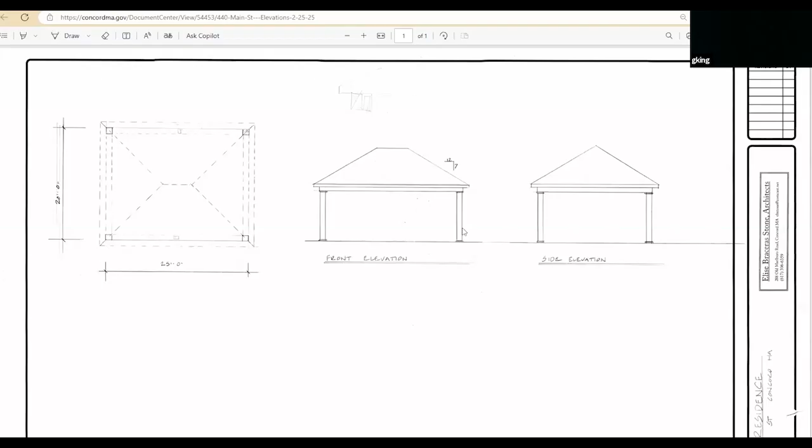I'm happy to pause at any time if anyone's got comments. I want to give a little context. The long dimension called front is from Main Street - that's right, because when you look at the long side, the front, if you will, is along here, 20, 25 there, 20 feet this way. So the hip is visible from Main Street?

I don't think so. Like I say, it's 14 feet high, it's hard to even see, even this garage, which is much higher. No, I didn't mean that as criticism. I'm just factually, I think if you're standing on the corner of the lot there to the left of Main on the drawing, I don't think you'd see it. It's oriented such that you can see the hip. I don't think so, okay.

Part of the reason is there's a fence here, at the corner, sort of in the middle of the property. And because it slopes so far downward, I don't think even if you were to stop there on the sidewalk and look, you'd see it. Because even this garage, when I'm over on Main Street by my driveway, you only see the top of this garage over here. So, but anyway, thank you.

You may be able to see it. I have a question related. Have you put up a post or anything to see how high it actually reads from Main Street? No. Okay, so it's purely conjecture. Yes, okay, sure.

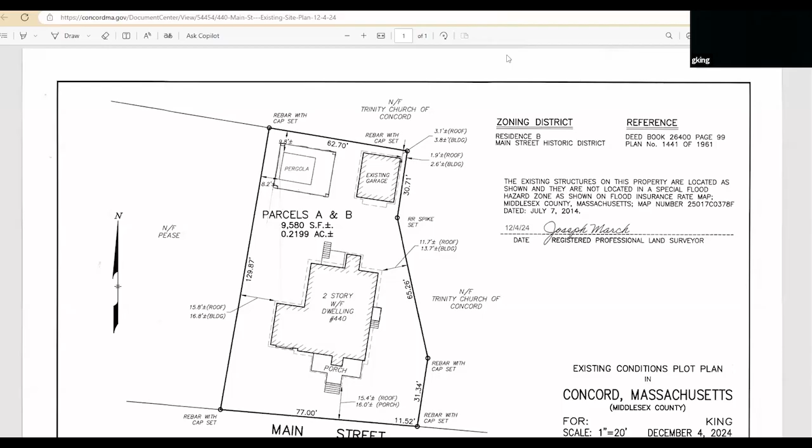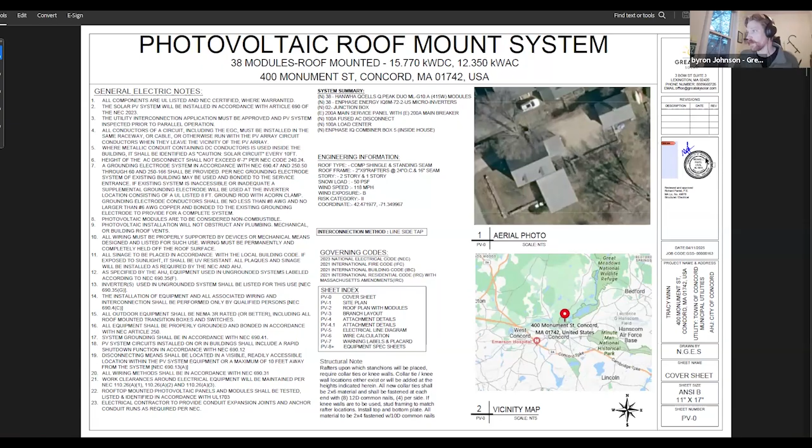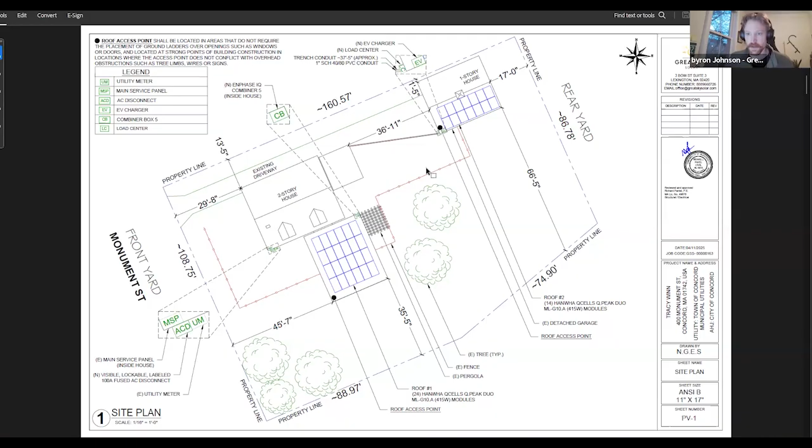So here's the site plan. As you can see, here's Monument Street right here. We have 24 panels all in one rectangle on this area of the roof, and then on the detached garage we're going to do another 14. Some things to keep in mind: right on this corner is where the utility meter is. We'll have to add, for the fire department and building department, an exterior disconnect, and I have a photo of that so you have an idea of what it looks like. We are also planning to trench from this corner here to the detached garage in order to get the electricity connected. I may be going fast or too slow, but feel free to go back to any of these at the end.

So here's just a visual of the panels. The fire department requires certain setbacks, so this is really just representing that. There needs to be a 36-inch pathway from gutter to ridge, as well as an 18-inch setback from the ridge.

This is just mounting equipment. I'll try to go through this quickly, but if you'd like to go back to it, that's fine.

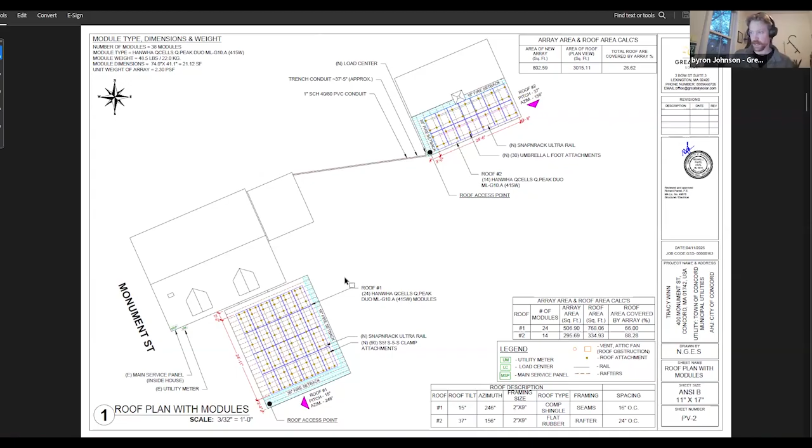Something to note: this roof has standing seam, and this one has asphalt shingles. So we'll be doing two types of mounting. This is for asphalt shingle, and right here, as you can see, this will be the standing seam.

The distance from the roof to the top of the panel is a maximum of 6 inches. It's most likely going to be around 5 inches.

Here is the panel we're proposing, all black. Just a little bit of specs here.

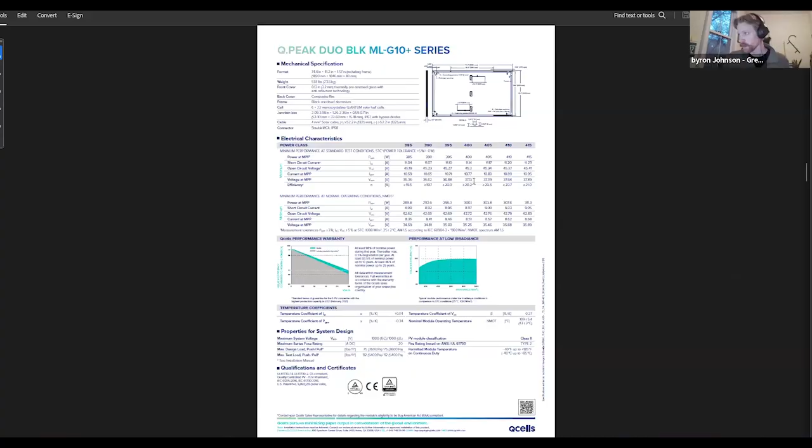These are the rails we'll be using. Upon installation, they'll be trimmed down to the edge of the array so you shouldn't be able to see any of them. And this is just a clamp for the standing seam roof as well.

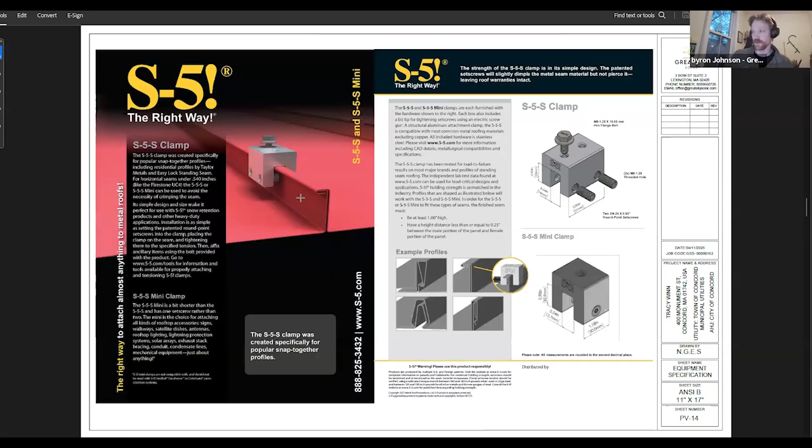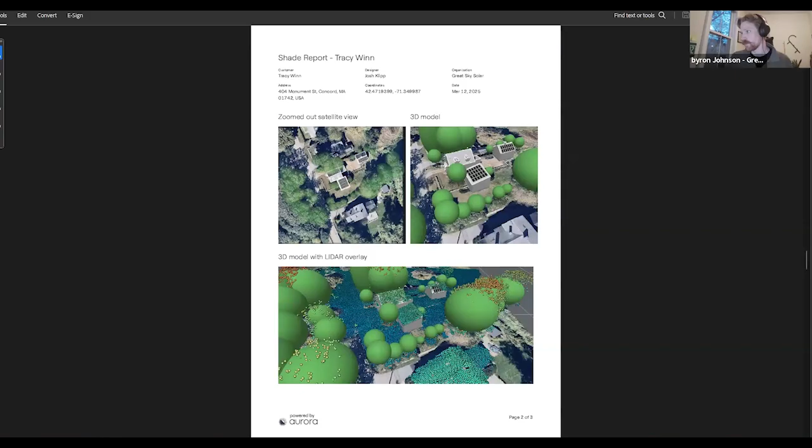This is a Google image. I'll run through a few from the front of the street. So we will be having panels on this area right here, more of a center view. And from the other side, these are the three closest images I could get from Google. This is my image from a few weeks ago, so you can sense a little bit of difference between winter and summer.

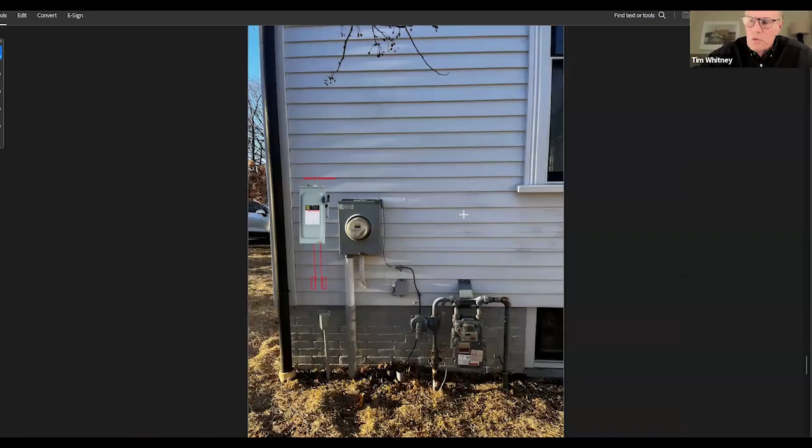Byron, did you say there's... Yeah, okay, I think you might be answering my question on the panels. Go ahead.

As per code, we need an exterior disconnect, so we'll be planning to mount that directly next to the existing meter. As far as conduit going up to the roof that we can see from the street, my master electrician and I actually did a site visit a couple weeks ago, and we really deemed this the best and least conspicuous place to run the pipe going up.

We will be going from the basement here. Monument Street is to our back as we look at this... so Monument Street is this way, so no, it would be to the front of us. This is the back of the house. Got it, thanks. Oh, back of the house.

This is just the proposed trench that we'll be doing as well, also all in the back. I haven't really mentioned much of the detached garage because from the street, based on these photos, I really don't expect to be able to see them.

Is the electrical panel, did you add something to that photo to show what it might look like? I couldn't tell. Let's see which photo you showed here, the electrical, is that to the left, is that your superimposed disconnect? That's not there now. Correct, that's what you're proposing to add, correct? Yep. Okay, thank you.

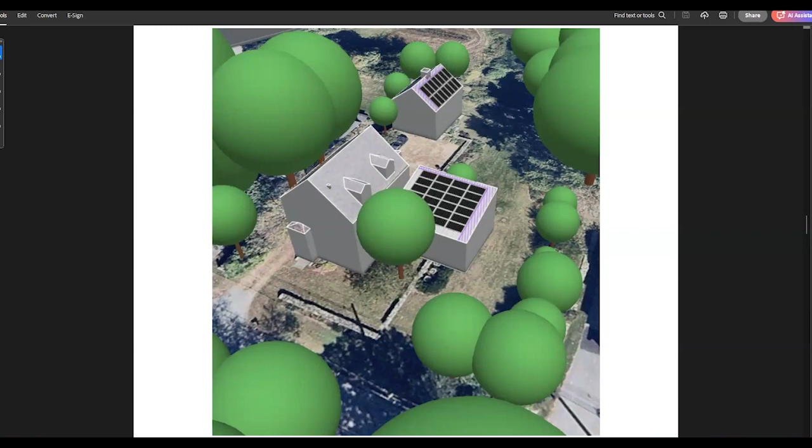Yeah, I'm just going to try to see if we have any. I'm looking at Google Earth, and the river is not up against that house. It's two properties away. I figured, okay, all right. And it's moving away as it goes. South, east. Thank you.

I don't think it's material. I was just surprised by the blue in the photograph. But...

Yeah, this is just kind of the database that we use to mock up our installs.

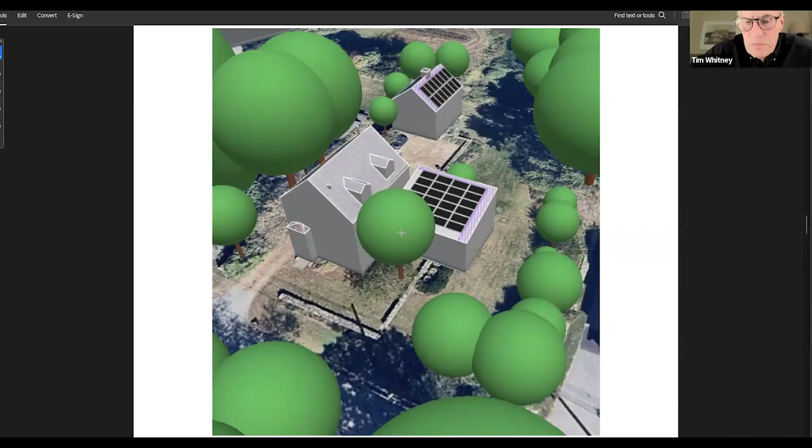I've always admired this property and the addition, which I think is very simple and beautiful. Somehow putting solar panels on this low-pitch modernist addition, which is very clearly separate from the old house, doesn't bother me in the least. We know it's going to be visible, not highly visible, but these panels are visible. But the fact that the barn is so far back, and that this is a low-pitched, modernist, different structure from the very simple New England house, I think is appropriate. That's my opinion.

I'd like to hear whatever everybody else thinks. I agree, absolutely. I agree too.

Do we have any other commission comments? Do we have any public comments? Okay, let's entertain a motion.

I'll move we approve the submission for solar panels on 404 Monument Street as submitted. I second. Thank you, Louis.

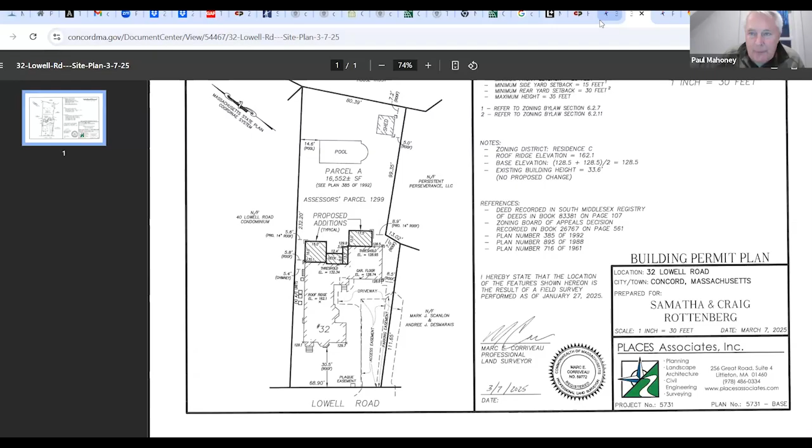Same detail as the rest of the house with the brackets and the same trim. And then the lower level will be the screen porch.

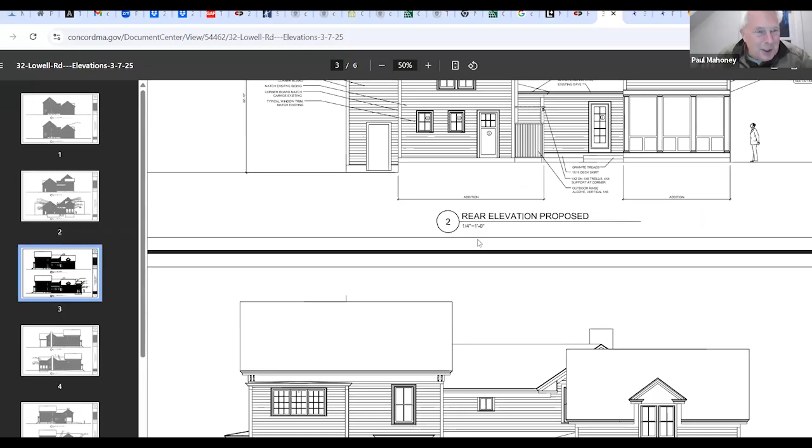Paul, do you have, just going back to the front elevation, the Lowell Road elevation, do you have the elevation showing the connector, so that sort of a section elevation? You know, beyond the, I'm not sure I do. I know I have other, well, here it is here.

So that is the right side elevation. Right, I'm talking about a front elevation that cuts through behind the main house. Oh, so we can, like cut through this section, looking back towards that, so we can see what the link looks like.

I don't think I have that. It's what's behind this structure. Right, okay, I don't have that, but we're not changing it. That's all existing to remain. You're not adding on top of that? No, there's no, okay, no.

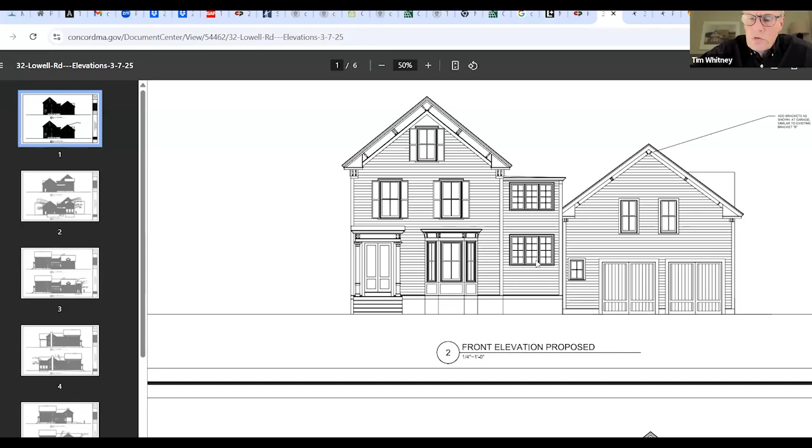So if we look at the back elevation here, you can see this roof area is this roof area. Got it, I get you, thank you, that makes sense.

So the right side elevation, this is the existing right side, the existing garage, and that all remains. Then this is the addition behind that, set back from the corner. I could check, but I think it's about 4 or 5 feet set back from the corner.

And then the other side, the left side, this is the existing elevation. This is white because it is the garage, so I just wanted to differentiate that. That's set back probably about, right, 24 feet or something like that. So what we'll be doing is adding on this structure behind the existing wall with the fireplace.

And where could you just tell us again where that bracket work exists? Currently it exists on the existing house. It was part of the original detailing of the original house. When this addition was added, it's added in some places but not everywhere.

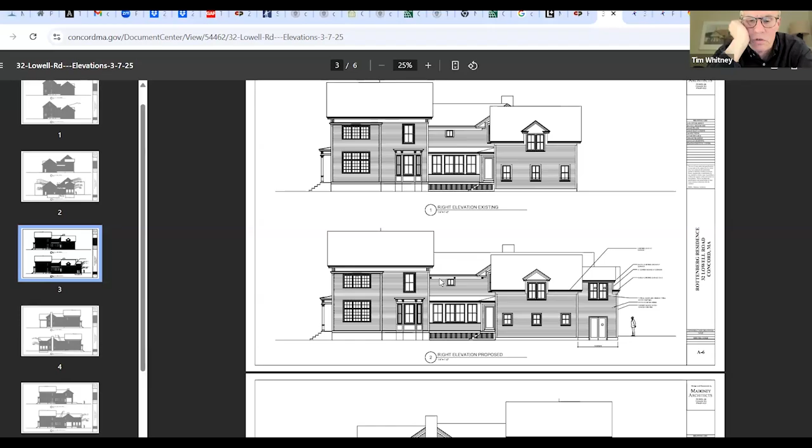Is that the only place brackets are put on beyond the main house? Yes. So not on the other side, whatever it is, the north side, or west? Let me hold on, if you just give me a second I can check a photo of that, because I may have forgotten to show them on that side.

Yes, they are on the left side. So basically what they did, I forgot to show them on my elevation here, but these do exist. So basically what they did is when they built this addition, they added the small brackets on the house, but for whatever reason they didn't add them to the garage.

Do they go up that gable with the chimney? Looking at photos, let's see, they do not go up the gable on the right side of the house. I don't have a picture I can see from the left. So for instance, let me come down here. Right, so this is accurate, they have brackets along the eave, but not along the gable.

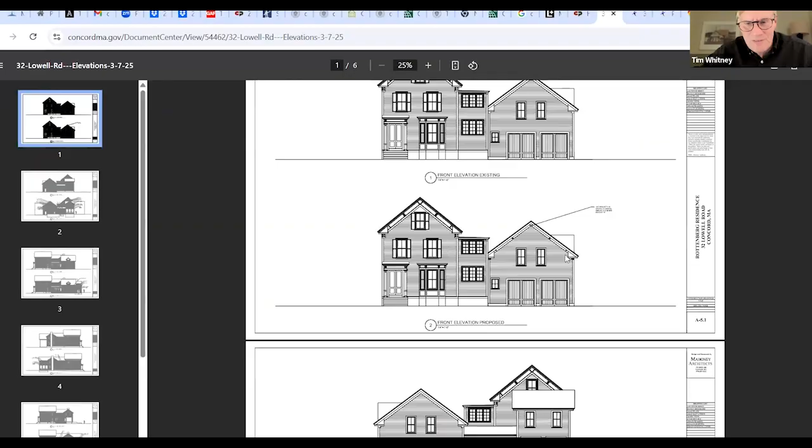Is that correct? Yes, that's correct. He's not talking about tearing anything off - no, this is the gable. I'm not talking about the garage, I'm talking about this part of the house we're adding on. These three brackets exist - we could easily not do them here, it wouldn't be an issue, but it would look really odd here, like somebody forgot to add them.

I would agree, that makes sense. They're proportioned to that size, they're already there, and you're continuing it at both sides of the gable, so that makes sense. I agree we should treat the new addition as separate from the garage. To add brackets to the garage would be kind of faking it, but to continue the brackets in this new addition would be pure, in that it's part of the new addition rather than faking the old one.

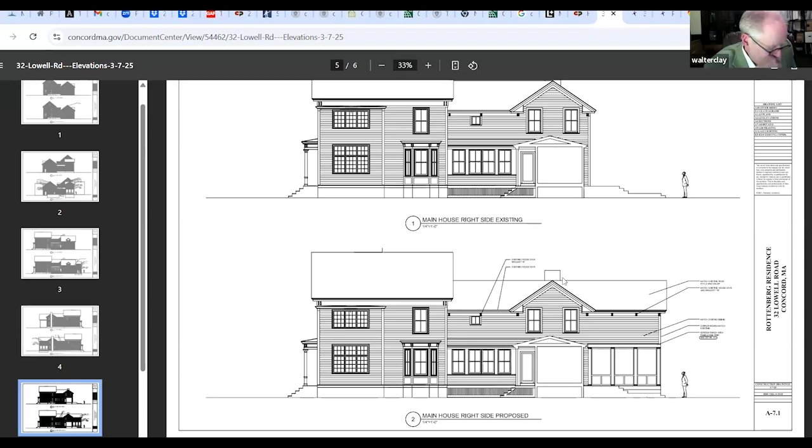That makes sense, I'm okay with that. How about, Paul, if we can go to the other side of the house - whatever that left side is. You're saying the brackets exist where your cursor is? I think they do, but I'm trying to find a photograph to confirm. Bear with me - these would essentially be mimicking, whether they exist or are new, the other side of the roof.

These exist where my cursor is, on the left side, so we would be matching them, same logic, continuing that. Exactly. All right, that makes sense. And essentially the rear of the house isn't visible from public view, so technically we have no say on the rear of the house.

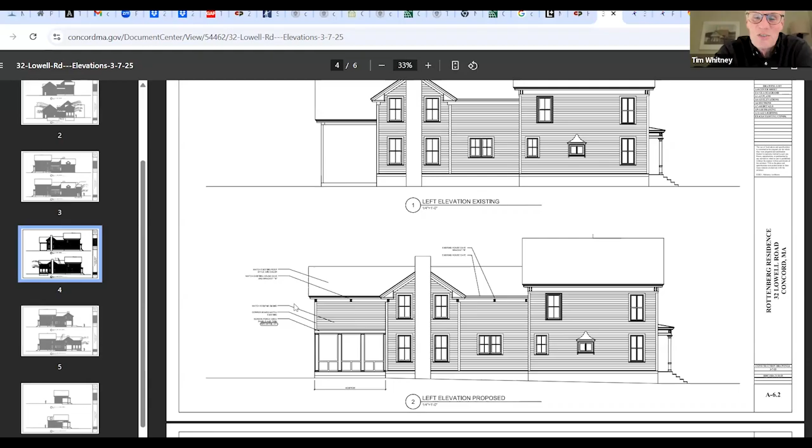So what we can do is suggest, if you show the rear of the house - any other commissioner can correct me if I'm wrong, but I don't think we have jurisdiction over this facade. But you might want to consider quieting it down to strengthen the main house, continue to have the main house be the primary thing. That's a suggestion, not a directive, because we don't have the power of directive on this facade.

I appreciate that, I think we can discuss that with Craig and Samantha. Other commissioner comments? It would make the original part of the house stronger for it not to be there. But again, no weight behind that opinion, and that's an opinion.

I'd echo Tim - I think the massing of these additions is quite attractive, and the views from Lowell Road, I think it'll look terrific. Any other commissioner comments before we open it to the public?

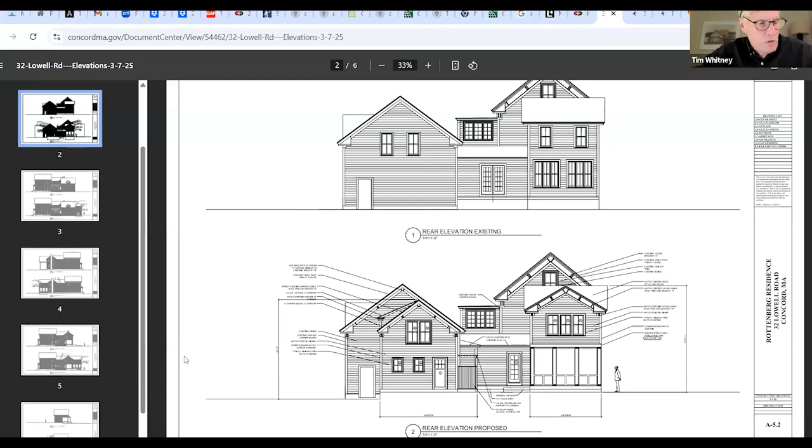I have one question about the arborvitae, which is masking - is that on this property or on the neighbor's property? It's on this property. Okay, so I would like to make sure that that is maintained. Yep, that's the intention. Okay, I think I understand.

I think it's possible because the porch is actually going to be built on piers, so we don't have to excavate for a full foundation back there. Okay. I would like that to be part of the proposal that continues to be masked.

I think that was presented that way, if I'm not mistaken, right? It was mentioned that those would stay. Yep.

And open it up to the public. Do we have any public comments? I can only see so many people, so if somebody's raised their hand, I can't see it. Please speak up if I'm missing anybody on public comments. I don't hear any public comments, so could I have a motion?

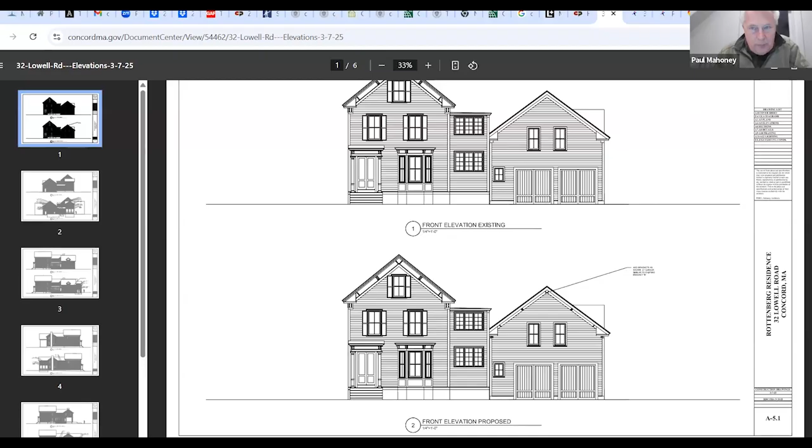Tim, can I add just one thing before you do that? Yes, please. I sent an email today - we made a change to the roof we're proposing to a different color that we think is a much closer match to what's there. I just wanted to note it's Williamsburg slate. You have it in the package online, it was added today. I can pull it up if you want. Yeah, if you would, thanks. Sure.

It's an asphalt shingle roof, right? It's the same product, just a different color. It's coming up - if it's real slate, we approve it. So that's the slate, it actually has some reddish tone to it, but that's actually what's on the roof right now. That's what's there now? Yeah. Well, I don't know if it's this exact product, this Timberline product, but the color is almost identical. Originally I didn't choose this one because I didn't think it was close, but then I went back and looked at it again, and it's actually very much like this.

Any comments from the commission on that? No. And the one other thing I wanted to note is that we are also going to the ZBA on May 8th. We have an application in front of them for a lot line special permit for the addition I was describing, which is going to be in the setback, but no further in the setback than the existing house. So just so you're aware, we still have to get their approval on that, and also for a minor FAR addition. Is that a variance you're going for? No, special permit. Okay.

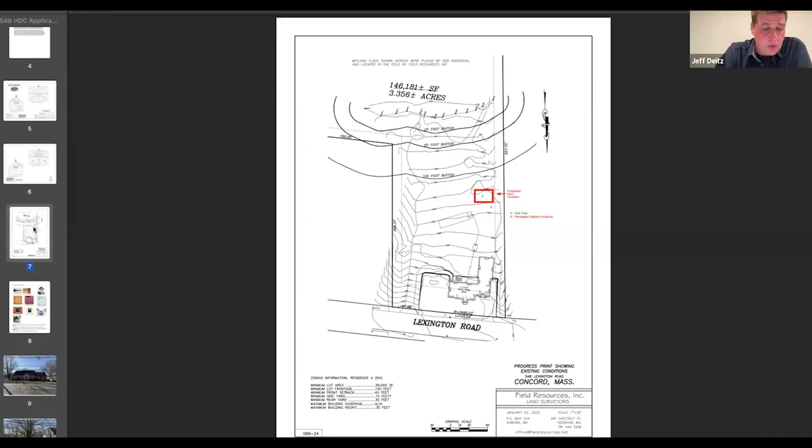The barn location, there in red, is about 12 feet below the grade of Lexington Road. The height of the barn is 22 feet above the grade, with a small cupola that will be 27 feet above grade where it's located. With the setback of the barn on the lower grade, the ridge and the cupola will be 13 feet and 8 feet below the main home ridge, putting it about 8 feet above the grade of Lexington Road.

The preferred location of the barn is sort of a compromise, considering the 100-foot wetland setback on our property. This is the front elevation and left elevation, which would be the only viewable sides of the barn from the public way, being Lexington Road.

I have a wireframe projection of what could be viewed from the eastern side of our home, looking down towards the rear of our property. Excuse me, Jeff, could you go back to the drawing again?

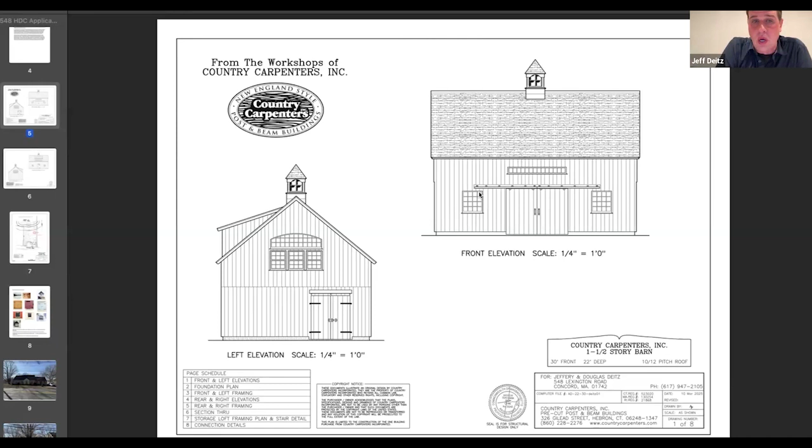So the front elevation faces, what's called the front elevation here, faces Lexington Road, correct? The front elevation is relatively directly in line with Lexington Road. The left elevation would be seen at an angle from the public way, that would be the only other side viewed for reference. And how long is that dormer on the south side?

The dormer on the south side is only about 8 feet wide. It's set back quite a bit, so I don't believe that is from the corner.

So the rear elevation is facing the stream, Millbrook? Correct, Millbrook. Yeah, Millbrook, south facing.

Okay, thank you. And is the cupola functional at all? Is it a venting cupola or is it just purely decorative? It is designed as a venting cupola. It can be closed off if we deem so, but as of right now it is an actual functioning cupola with louvered windows if you choose it.

I can add some details to the actual barn here as well. The barn siding is vertical eastern white pine boards that will be painted to match the existing color on the home. The doors are all handcrafted board and batten style with hand forged pintle hinges, traditional oak latches, and the roof will be shingled with asphalt shingles to match the same style and color of the existing dwelling, which is a timberline pewter gray style.

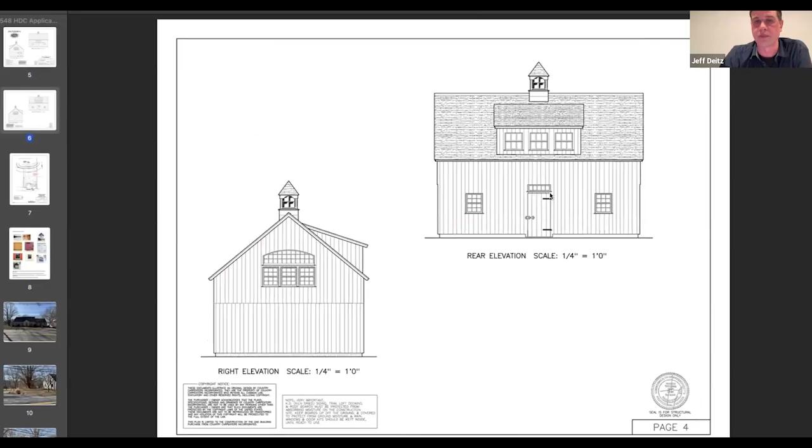Okay, these lights are actually existing lights that are on our garage that were approved, I don't know, 6 years ago by the HDC. And you're proposing to paint the barn to match the house, correct? Yes. And is this rough sawn? It is. Eastern white pine? Yes.

Any other comments, Jeff, before we open it up to Commissioner? Nope, that's what I got.

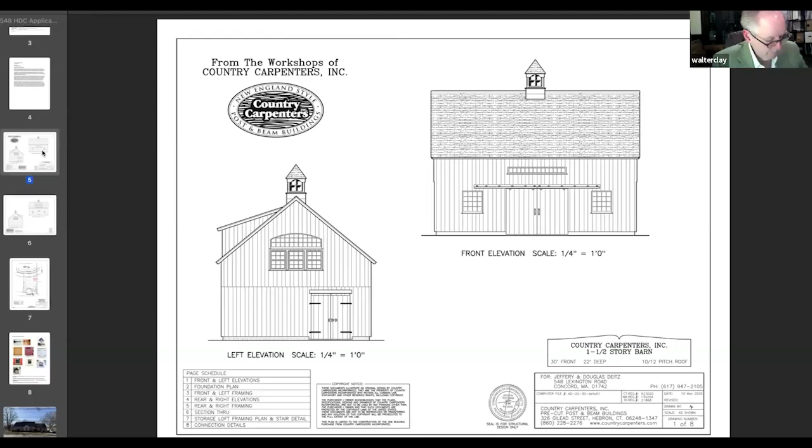Comments? I have a couple. One, is there a particular reason for the vertical siding rather than horizontal siding? That is what that particular company and project provide and build. I've seen it in other regions and areas where it's fairly prevalent. There's one right across the street from us that's also vertical. Is it shiplap or tongue and groove? It's shiplap, yeah.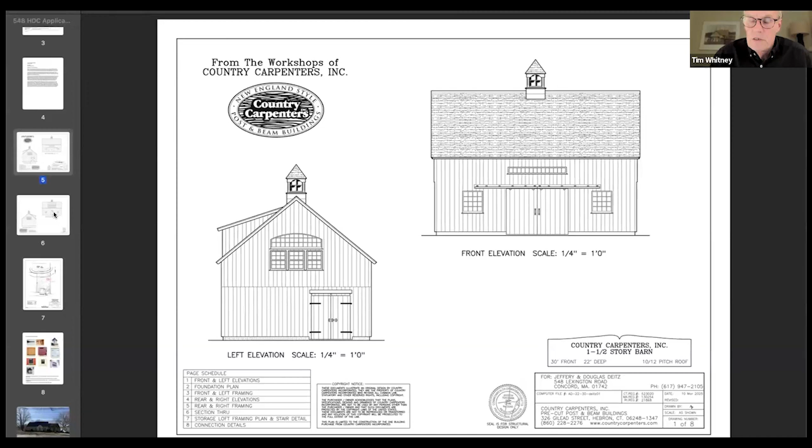My question is about painting it to match the house. I have two questions: one is the cupola, and one is painting it house color versus letting the pine weather, or painting it gray to differentiate it from the house, as pretty much all New England barns do, especially with something set so far back, letting it weather into the landscape. Secondly, the cupola—there are plenty of barns that have cupolas, but this is a small cupola, not quite in proportion with the size of the barn. I understand they're good for ventilation, but the best barns are simple forms. I appreciate that the dormer is on the south side and you can't see it. But those would be my two questions.

It's been an internal conversation as well about whether to paint the barn or not. We actually do enjoy the look of an unpainted barn. To be honest, as far as blending into the community and dealing with the HDC, we respect it, so I made the assumption that painting it to match the existing home would be the path of least resistance. But I personally enjoy the unpainted, weathered look. There are several products that have weathered extremely well and look quite attractive. So we're open to the suggestion on that.

I would second the weathered look, having it differentiated from the house. That's actually my personal preference. I'm glad to hear it.

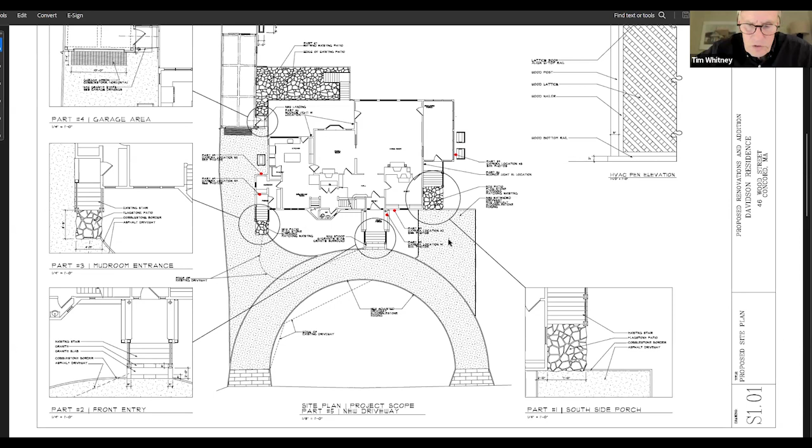Next is 46 Wood Street, a project we know quite well. Mark Christopher representing Battle Architects. It's in the Main Street Historic District for various landscape moves, some lighting and security cameras, HVAC screening, and a variety of items.

Robert, are you presenting tonight? Yes, Peter's batting leadoff before I dive into the presentation. Okay, thank you. Good evening, Mr. Chairman and members, I'll be very quick. As you aptly described it, this is sort of phase 3 and the final phase in the comprehensive renovation of this home. The first phase was the new garage, which you'll see in Bob's presentation now that it's complete. That was followed by elements of the renovation of the main house that you all took the time to look at on site before approving last fall, including gutters, stairs, some exterior lighting and railings. We had anticipated and notified you there would be a subsequent phase, largely hardscape and final design details, and that's what Bob will walk through with you. We'll try to be brief but responsive to your comments.

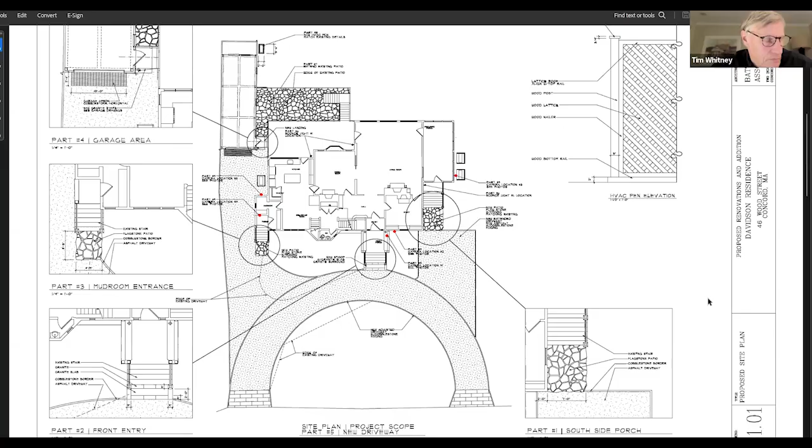Thank you. Everyone can see my screen, correct? I just want to double check—yes, I have 3 screens on my computer here. This presentation breaks down into 9 pieces. A lot of these are smaller chunks, so we'll dive right in. Parts 1, 2, and 3 are enhancements to the bottom of these 3 staircases on the front side of the property. If you remember from the previous phase, we had a new staircase and new newel posts that were painted. Nothing's changed in terms of the staircases to landings.

These things are going on as you're going from the staircase onto a landing. So these are kind of like new landings. As you're working from right to left, this is the screen porch. We're adding a new landing here.

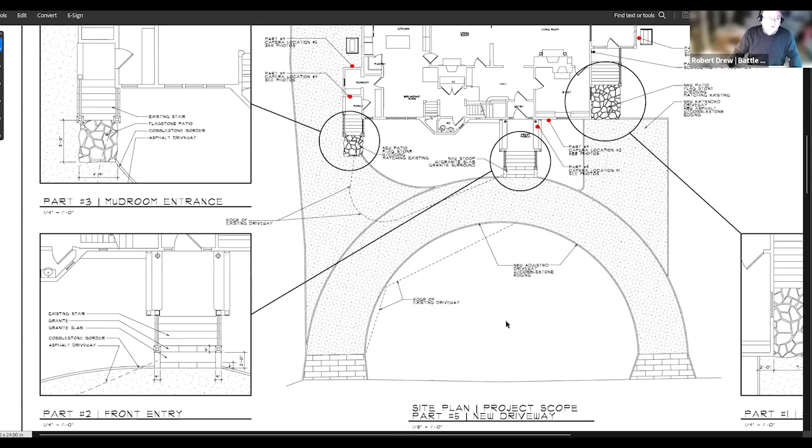We're adding a new landing right here at the front door, and a new landing here at the mudroom door. I blew those up a little bit, kind of a general site plan with blow-ups to the side to help explain this. The design intent is to have the same type of flagstone pattern that we have in the back of the property for the screen porch and the mudroom, and to make the front door feel a little different and more formal. We're adding a bit of granite layout at the bottom of the stairs here to feel different than the other two sides.

So the two sides are kind of like the saddlebags. The front is the more formal entrance.

Those are the first. Both at grade? Yes, that's correct. Thank you for the question, that's a good question. Those are the first three parts of the submittal. The fourth part is in the garage area.

As Peter was mentioning, this was phase one, which is exterior and is done. We'd like to add a cobblestone apron in front of it, instead of just grading up the asphalt. We'd rather have it a little more detailed with some cobblestones, which as you've seen on site, are incorporated elsewhere on the property. So we're relating to that a little bit.

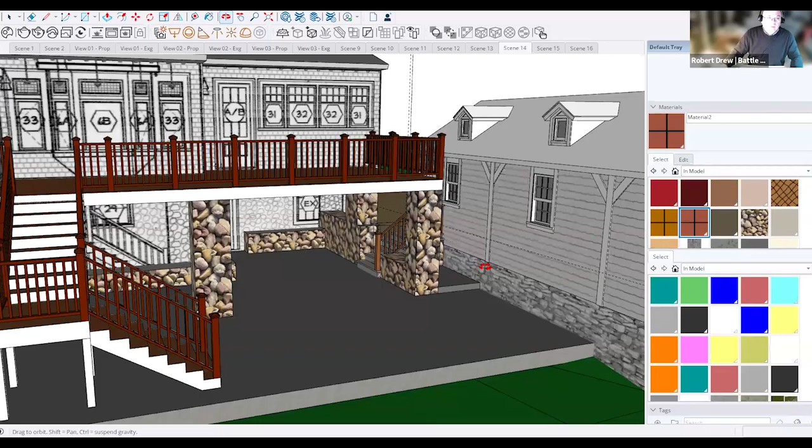As part of this piece, and I'll show you in the model in a minute, we have a people door on the side of the garage here. The door opens out. I have a bit of a model view to help explain. I sent this up as supplementary information yesterday to Ann to circulate to you guys. The recommendation is to do a bit of a model so you can understand the design intent.

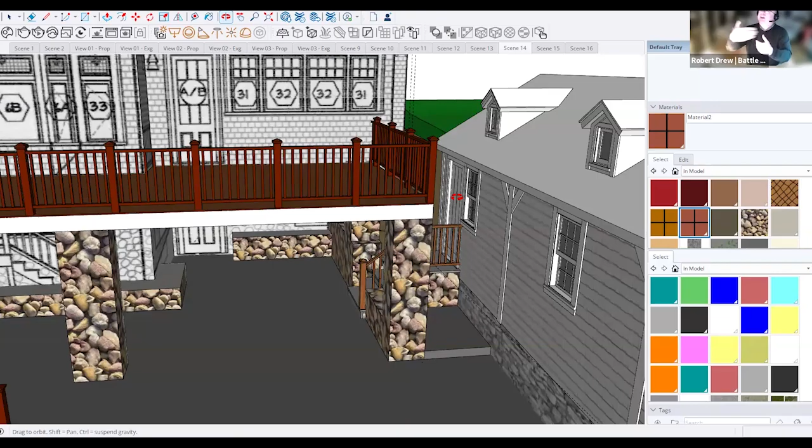There's a people door here, and because of the size of the garage and the site constraints, the door doesn't open in, it opens out. But it's pretty tight right here. So the design intent is you have two ways in. If you park your car inside, you can poke down — there's a set of steps that goes underneath this patio here.

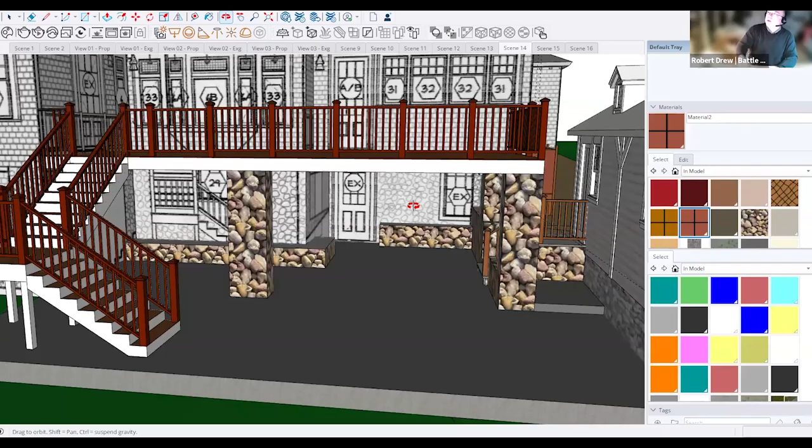There is a basement mudroom here where you can just come in if there are bad elements, such as we had this past winter. Come out the garage, go underneath, right into the mudroom, and there's a staircase that leads up to the kitchen area. Or you can turn around, come out this way, and come up the little mudroom we have in the front here.

It's a bit of a squeeze, but we're adding this staircase to give people both options from the elements, and also to clean up this area a bit. The design intent is to match the existing details of the porch on site that you've seen, but the finish is a little different because we have these HVAC pens, which you saw in the previous submittal as Western Red Cedar.

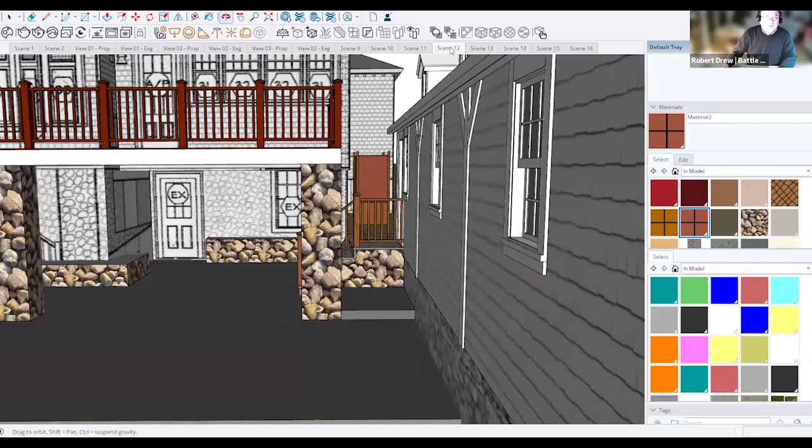We're changing the finish a bit because these are closer to each other than the upper deck here. I'm going to show you these views a little, and if I make you sick, I apologize, but just little views as you see it.

So these vignettes, I put them in the narrative I sent to you guys yesterday. That's kind of from the street-ish a little bit. So that's this piece.

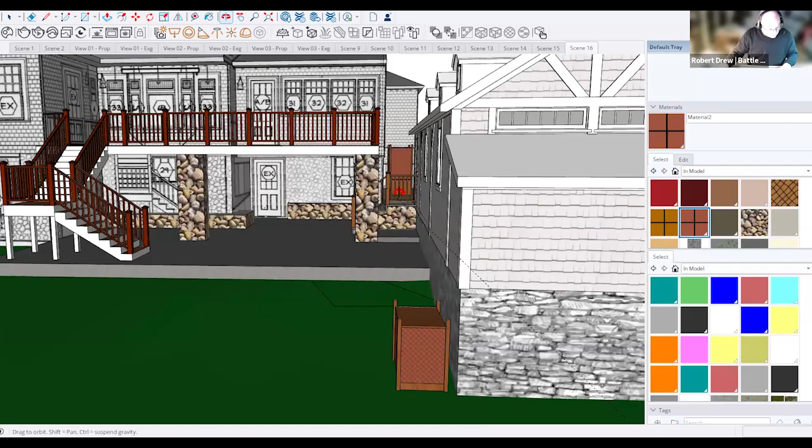Next, I'm going to switch back to the site plan. The next phase is a new driveway, what currently exists. I'm sorry, just before you go by — it's not clear to me what of that stairway is new versus existing.

Oh, I'm sorry, so this column stays. This column stays, this is all new — this stair is all new. There's an existing couple of steps here that's seen a better day. I'll show you the existing photo in a minute. Okay, thanks — but this is the new staircase here.

I'm sorry, the landing is there now? No, nothing's there now. Nothing's there, okay, right now it's just dirt. And then this was going to eventually be the third phase — how do we tie everything together and button everything up around the main house?

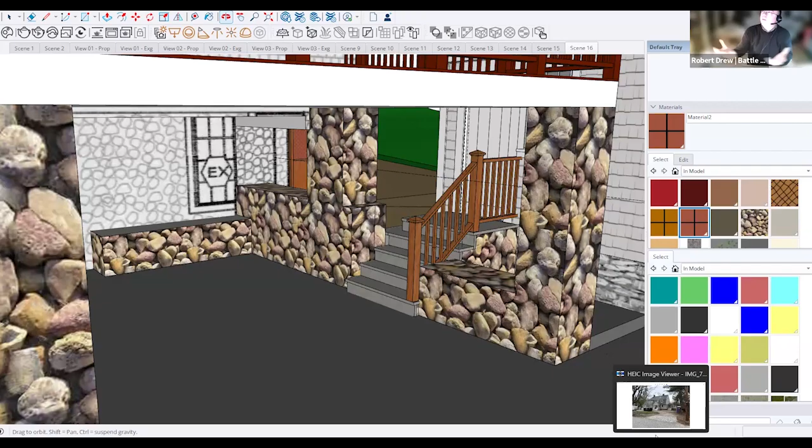Let me show that photo real quick, give me one second. See, there's a couple steps right here — that's where that new stair is coming in, it's kind of like right here. So we're filling this in and making the stair here close, hugging this tall column.

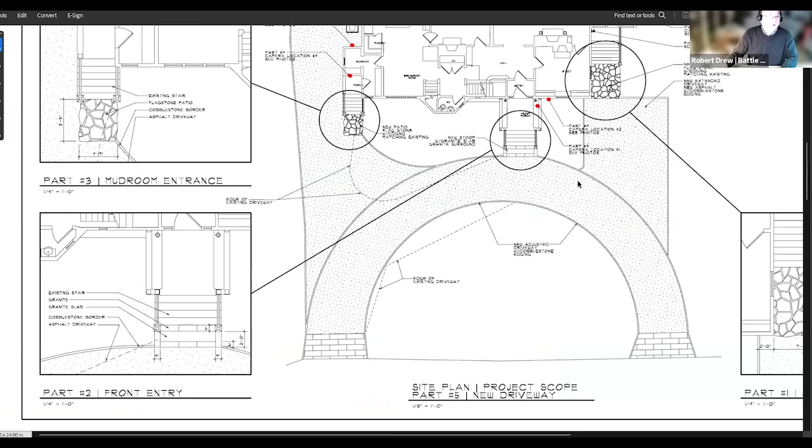Getting back to part 5, the new driveway. What exists currently today, these are photos taken this morning, the driveway was originally gravel. The design intent is to add a new driveway, a cleaner driveway, as asphalt with cobblestone edging.

The cobblestones you see at both ends of the driveway are going to remain. So we're kind of creating this arch back into more formal, with asphalt and cobblestone edging.

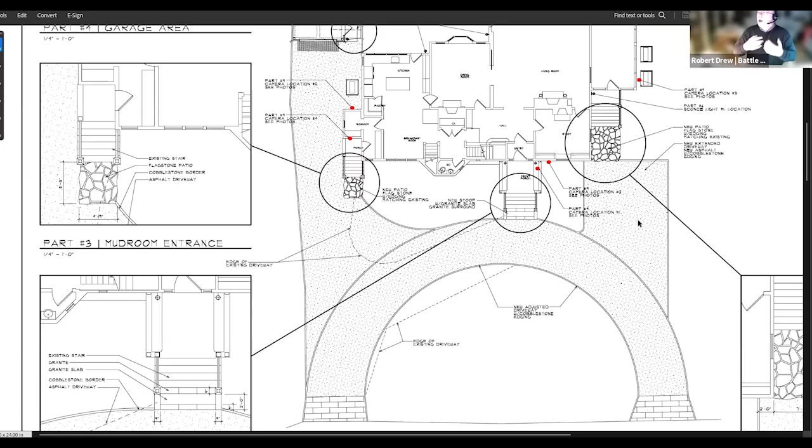During the life of this house, back here became a parking spot by default. Visitors come, they just pull over there. Over time, before construction for the garage and main house happened, there was gravel, mulch, weeds, junk and mud. It all got beat up because people were making it a parking spot. So we're kind of making it more of a formal parking spot here.

We're also continuing the cobblestone edging so you can feel the curve. And then the asphalt proceeds down to the garage. That's where it stops.

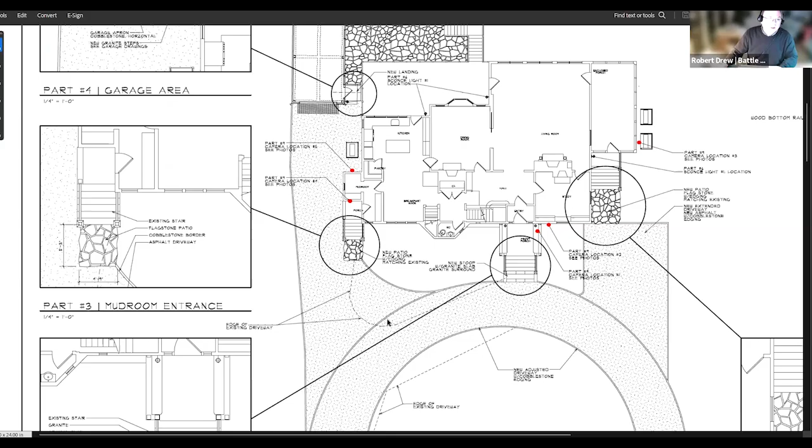Robert: So that granite edging is flush to the drive? Correct, because you had to plow it. And flush to lawn? Within an inch or so. You ever see those, you put asphalt down, it's a little bit bumped up, and there's a transition between that bump and the grass. Does that make sense? Yeah, thank you.

Yep, no worries. Part 6 is sconce lights. There's 5 locations on the main house and 1 on the garage. We found a fixture from Patty Brothers, which we used on the front of this house, a company out of Sudbury, used on another project you saw a couple of years ago. Those locations are existing locations, just replacing the fixtures, which have seen a better day.

So those locations: 1 next to the screen porch here, 2 on the upper deck, and then 1 on either of the 2 doors underneath this patio at the back of the house, 1 by each door. There's also a garage sconce light here, which splashes light for this new staircase we're proposing.

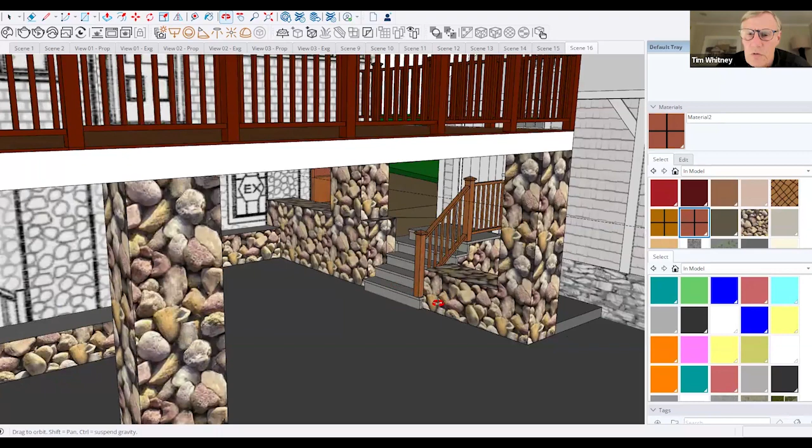Robert: Sorry, just, you said 5 new lights in existing locations? In existing locations, okay. Yeah, I can show you them all real quick. See that's 1, 2. There's a door here. There's a door here. And there's 1 right there. Those are the 5 locations.

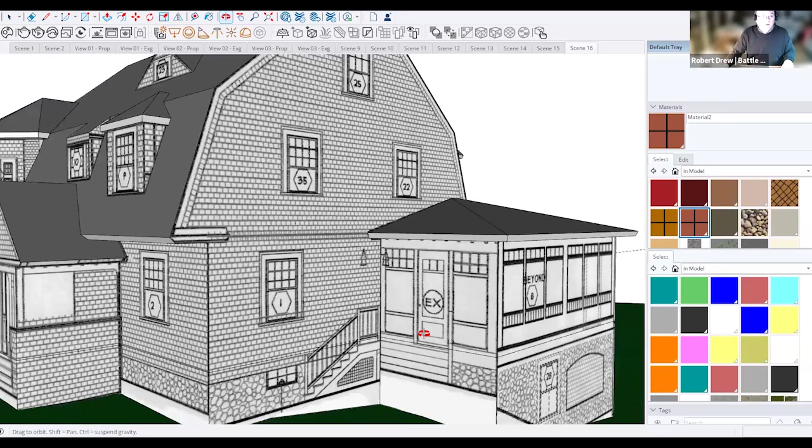Okay, that's on the main house. So is that 2 sconces next to each other there, one on the porch and... That's just like, we just took our CAD files, we did this kind of quickly, just cut and paste. I don't know if you know the good old days where we made foam core models. It's fine, so it's a ghost and not really there. Okay, can I just back up?

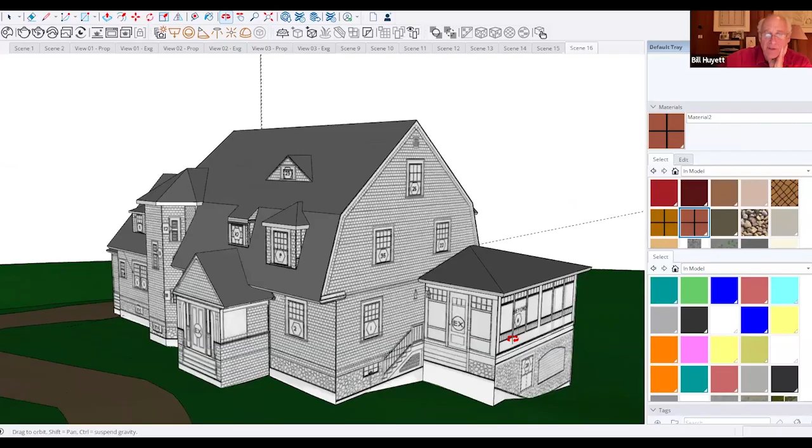The 5 are existing locations, but the 6th, by the new garage door, is a new lamp. That's correct. You're not changing previous front of house lights we've talked about, correct? Nope, those are in place, those were approved, those are done. And the other locations here, it's kind of facing the stair.

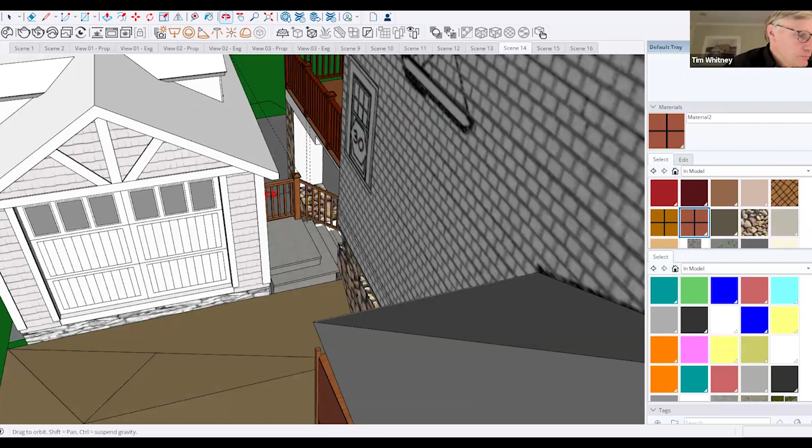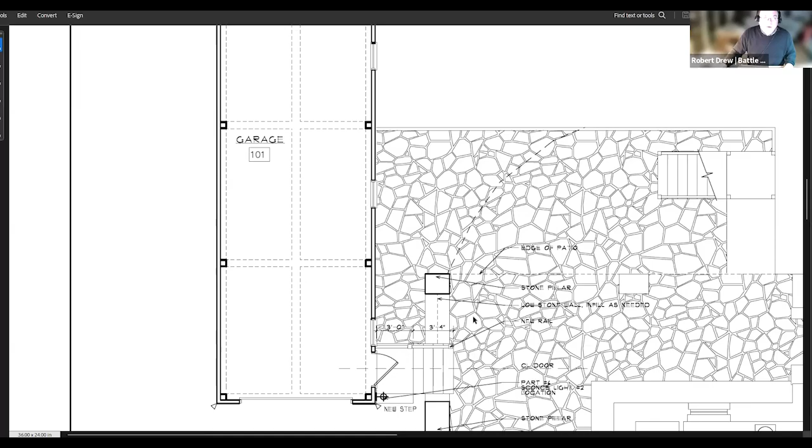I'll go to the back. It kind of curves back, I'll show you the photo in a minute, but the existing curves back, it pitches out away from the house so the water doesn't go into the house. We're trying to fill this in here with the same stone, but making it a little more cleaned up.

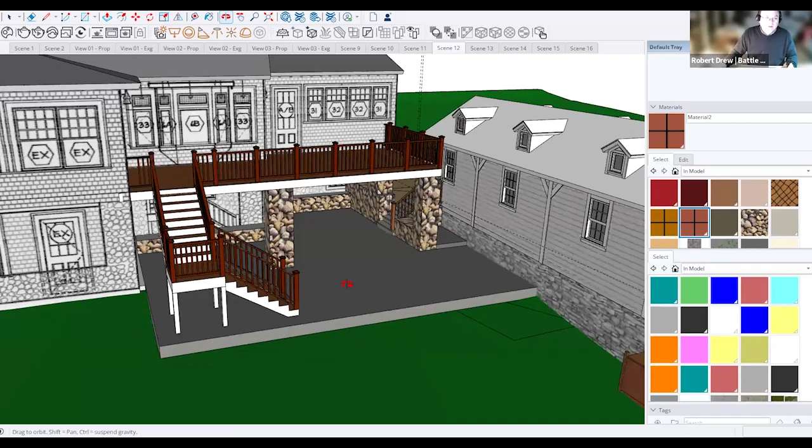Not muddy, to be quite honest. This also helps make it a bit of a private spot. If you're up here eating, the house over here has a taller deck where you can see onto the deck. So this does two things: cleans things up, extends things, but also makes a little private spot if you want to eat privately.

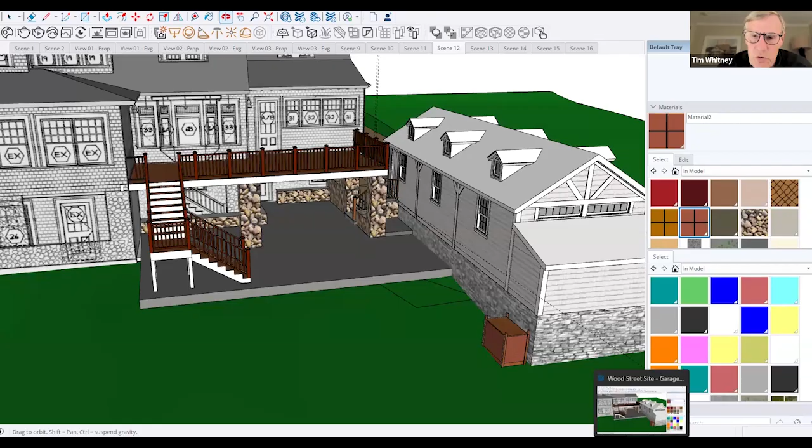Is that a step from the stone down to grass, or is that a computer glitch? Computer glitch. Let me show you the model, excuse me, show you the photo real quick.

It's a good photo. Sorry, Tim. Give me one second, I'm going to pull up a better photo for you guys.

The intent is to have that transition into lawn and be flush. It's pretty close to being flush, like 3 inches down. Is the stone showing up in the existing photographs the pattern and style you're talking about? That's correct, I call it fieldstone, it's closest to fieldstone. It's matching what's out there on site.

Fieldstone or flagstone? Flagstone, excuse me. Can you bring up just that photo? It shows quite the extent of it. Somewhere you had a photo, just so we can see that. Hold on one second, I apologize for holding you guys up.

I'm sorry guys, hey there we go. This is gonna explain it. Come on, computer. This is like last week.

See this, how it kind of curves here? We're bringing it, we want to bring it straight over to meet the garage. If you can see the pattern, that's kind of what we want to mimic on the two side entries, front and back. It's kind of just filling it in, and you see how it's a little bit of a lip, like 3, 4, 5 inches. It's kind of just taking that elevation, I think it's in the documentation, the contour line, just continuing it out.

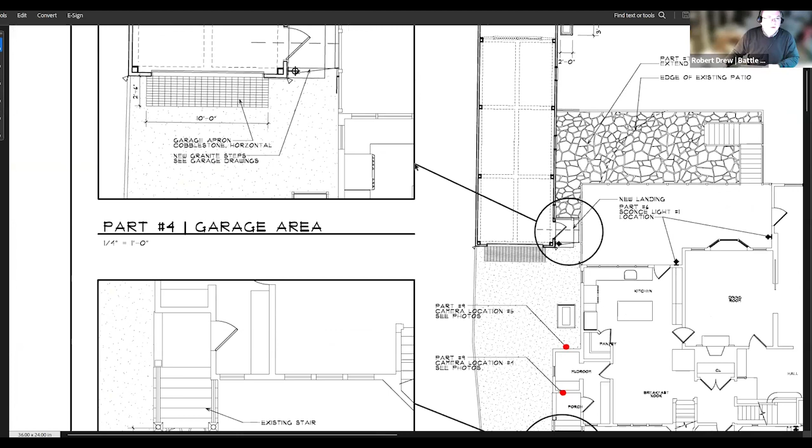The pen is similar in spirit to the other HVAC pens you have approved on the previous submittal. It's kind of around the corner so the neighbor doesn't see it. From the model, it's right there. From the street, I mean obviously you'll see it from the water, which is kind of under your jurisdiction, but from the front you don't really see it. It's kind of just adding an HVAC unit for the garage and having a pen around it, similar to the details we showed you before.

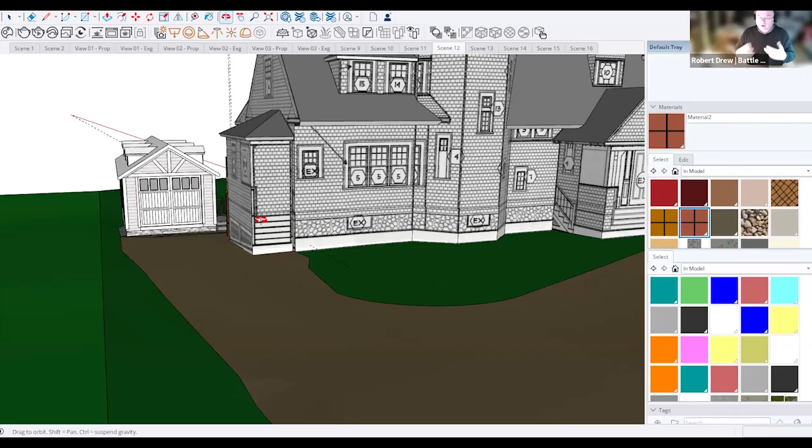Last on the list, spoken about at the last submittal, we mentioned we're going to add to this submittal is the security cameras. This is in conjunction with Lexington Alarm, which everyone uses. I kind of highlighted this in red, showed photos where they were in the submittal we sent you. Working from right to left, there's a security camera here tucked under an eave, another one tucked under an eave, one at the entry, one by the entry to the mudroom, one at the back of the entry.

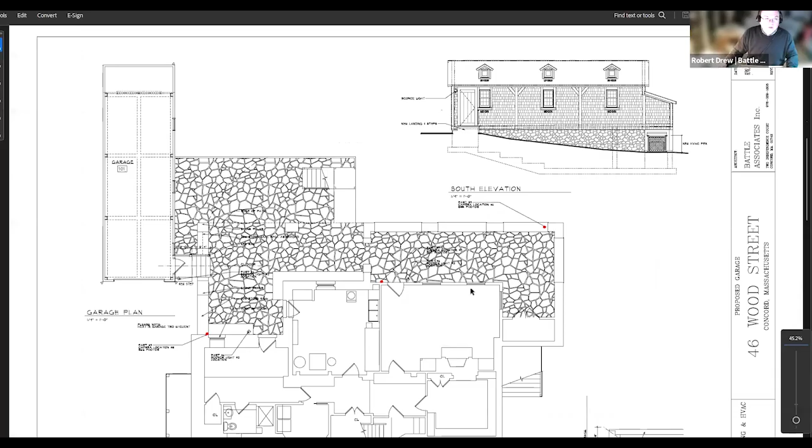I'm going through these quick, but I can dive deeper if you'd like. One here kind of at the back, one by each, one near the doors underneath the patio. So there's a handful of cameras from Lexington Alarm. I have blow-up photos that show you if you want to dig more into this. But that's where we stand for these 9 phases. I'm happy to answer any questions, and I can spin around the model as needed.

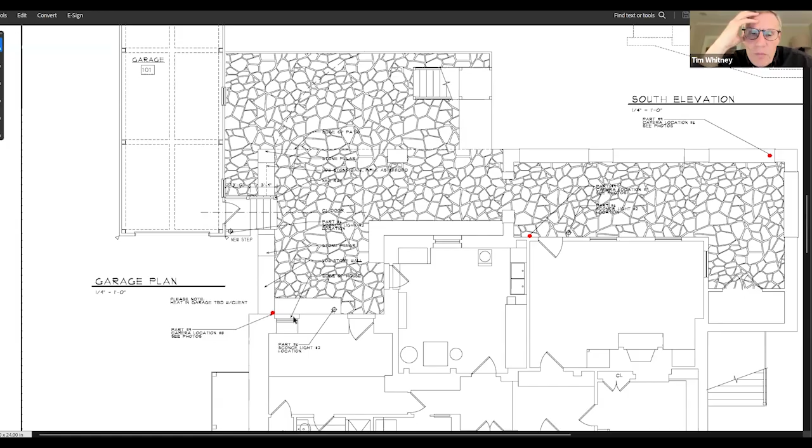That's the one by the front door. Can you zoom in a little bit or something? Yeah, now these are photos taken from close right by the front door. I have some photos taken from the street, so if you don't understand what I'm saying, it's...

And just to be clear, these have already been installed before you're asking for retroactive approval? Correct, and only one's not installed. It's at the back, the wire is there.

How many of them were installed the last time we were there? I have to defer the question. Dirk and I remember it being a bit of a contentious point, so I'm not surprised. I totally appreciate the question. Mr. Chairman, I do remember the question being raised. I think it was clarified that these cameras were installed in part to ensure security during construction. So if there are any concerns, we're happy to address them.

But once construction is completed, will the cameras come out? No, these are intended to be permanent at this point. They've been adjusted and the locations have been identified, but if the HDC sees fit, we did include all of the details here with photos of each. They're intended to provide comprehensive security while also being discreetly located.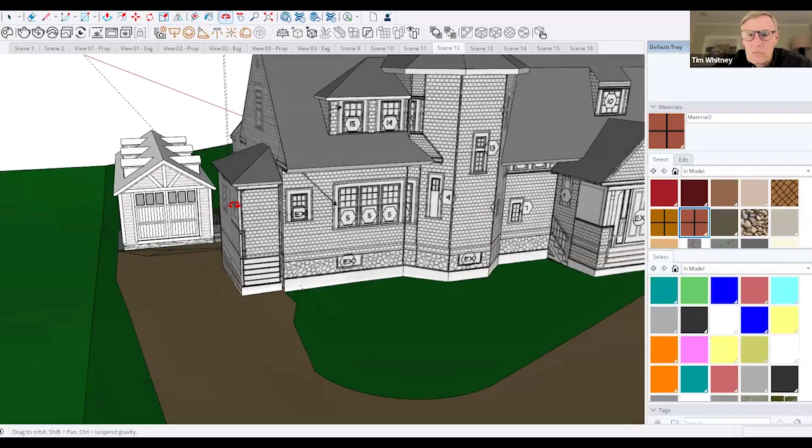The second comment is the light fixture, the new light fixture at the garage. Just wondering if we could try to minimize the amount of light that gets projected out to the street. If you think about the guidelines, it's about minimizing light that's visible from the street. If there's a way to put it not on the wall of the garage, but inside that stairwell, where it would still light the landing and the stairs but not be visible from the street, that would be, in my mind, a preferred location.

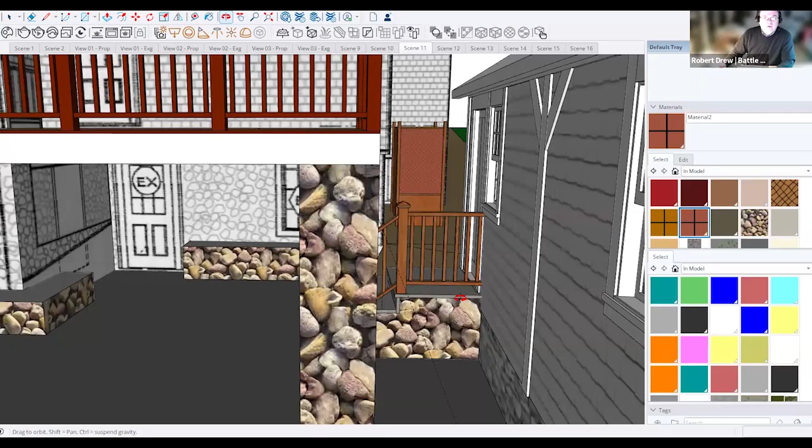We have to kind of make sure we splash the landing. Yeah, I appreciate the question. That's why we kind of turned it on the side here. I understand what you're saying. I got it. It's not the most elegant solution, but I understand.

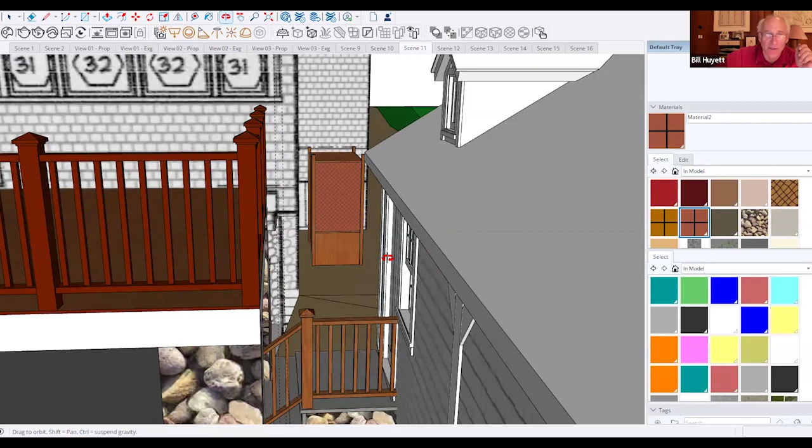The amount of light, the cumulative number of light fixtures, is high, projecting light onto the street, and I'm just trying to minimize that. Totally understood. Could you put some sort of baffle on the street side? Could do that. Or at least a motion detector. Yeah, both those are good ideas.

Yeah, absolutely, I just want to make sure there's light here if you're coming back home late, in the winter months, with the groceries. Okay, I'm sorry, go ahead.

And here is the homeowner. Let me explain the history of the sconce. I had originally had no intention of putting a sconce there. It turned out that when you have a landing and a staircase, code requires you to put one there. So the origin of this sconce and its location are due to code.

We would certainly limit the wattage if it is installed to a maximum of 25 watts. I think that's very adequate to light the landing. So we would seek to minimize any light that's getting out.

The sconce we picked is of a very traditional style, which resembles, according to an old photograph, the literal carriage lights on the carriage of the owner of the property in 1905. It is a small and discreet sconce. We worked hard to find one that would be as invisible and as period correct as possible.

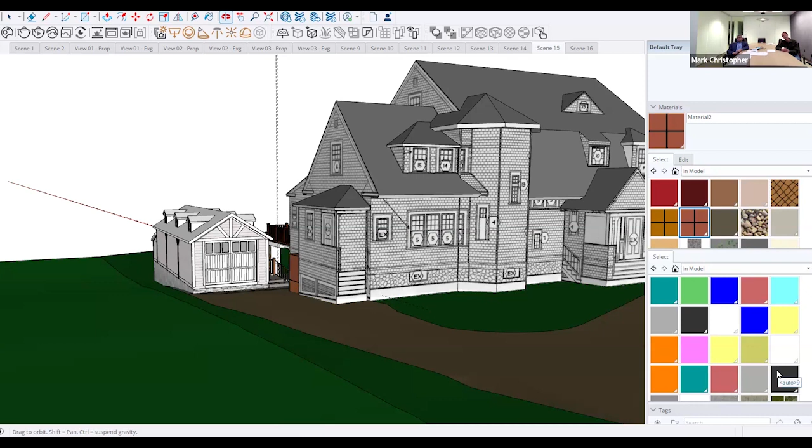So while in the abstract I'm very favorable to the view that we should work hard to limit the number of lights here, this one has been minimized in advance, and we would be happy to promise to limit the wattage on it as well. I think maybe adding a motion detector, as Bill suggests, is a good idea.

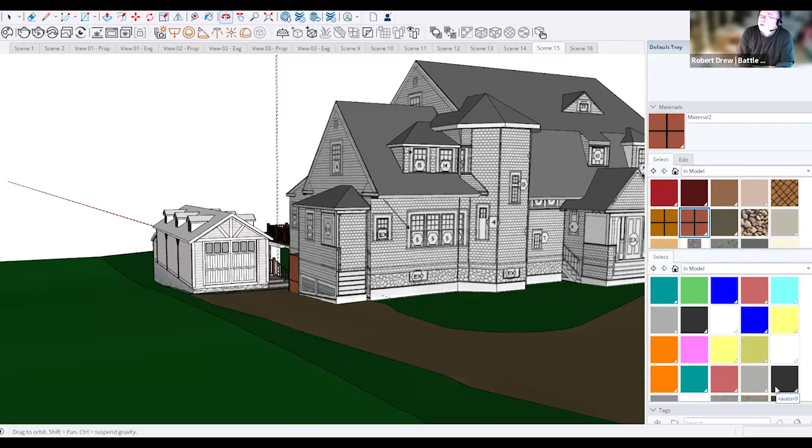That can be done. Like a BK lighting fixture and a color to match the eave, so it kind of fades away into its background, which we do all the time. Even on non-historic projects we do the same. You kind of want them to go away because they're not the prettiest.

Robert, could you go back to the security camera plan again, the street level one? Yep, give me one sec.

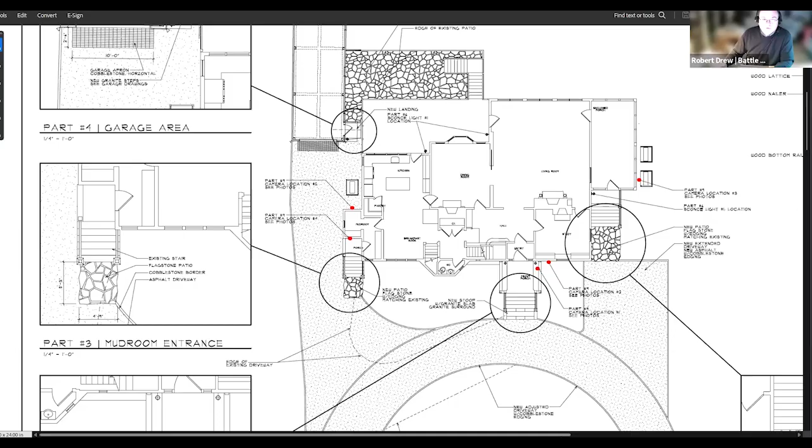I can share the photos too if you need. Starting from the right, there's one above the AC unit, then one to the left of the entrance, and then one tucked up in the entrance.

It looks like it's potentially invisible from the street. I can speak to that - I actually laid down on the street with a camera to try to photograph that security camera by the central front door, and you cannot see it from the street at all.

So I actually want to move it up about 7 to 10 inches to get it away from the sconce, just from the point of view of visual appeal. So if we do that, it will be even more invisible if there is such a thing, but it is not actually visible from the street.

Okay, thank you. So if you go back to the plan, Robert - there's two on the right side of the house that are tucked under eaves that are visible, and there's one under the entry. It's like right there - this is taken from this morning, so it's right there and right there.

Can I just show you the other photo? Maybe it's a little easier. If you could just go back to the plan - is that one under the roof right there? That's correct, can you give me one sec?

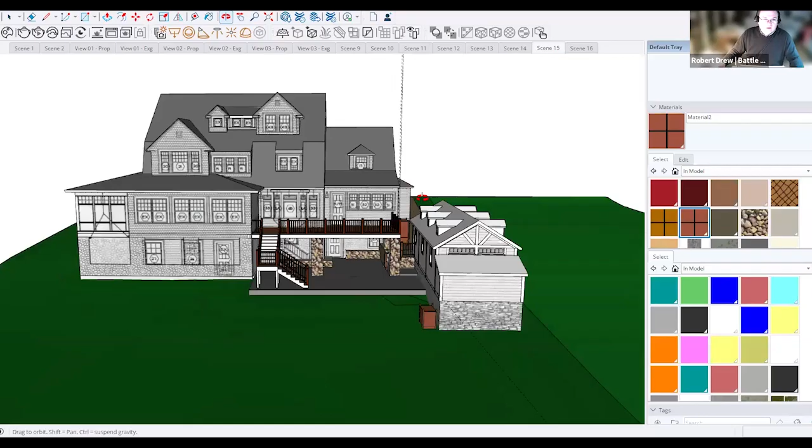And then there's one behind that shed, which could be seen from the river, but it's pretty de minimis in my mind. My point is that it seems like there's two looking from the street that have some visibility - the right-hand two, assuming the other two are under porches and could be moved up as high as possible.

And are there any other? The ones that are in the back patio are under the patio by the doors, if that makes sense. You won't really see that if you're at the river. It's really just if someone sneaks underneath or into the patio trying to break in, that's all. When I spoke about it, those from the front are the ones I think hurt the historic visibility - the back is quite practical.

I understand you're more likely to have an intruder in the back than on a busy street. It's also a unique house where there are a lot of entrances into the house - not like 2 or 3 or 4, it's several, which also affects things. But please, I'm sorry, I didn't mean to talk over somebody.

Bill, if I may address what you said, I'm very unenthusiastic about visible security cameras. And if we keep any of these, I want them to be as invisible as possible.

From spending a lot of time in front of the house, I know from experience that these two cameras that face the street on the right, one of them is not consciously perceived. I didn't know it was there for months until I noticed it by accident. That's the one to the right of the porch. I think it's because it's inlaid into the eave above it and slightly masked by the overhang of the roof, and the white housing blends in with the wood behind it. That one, in practice, is not a problem. The one on the right is more of a problem because from some angles it's visible against the sky behind it.

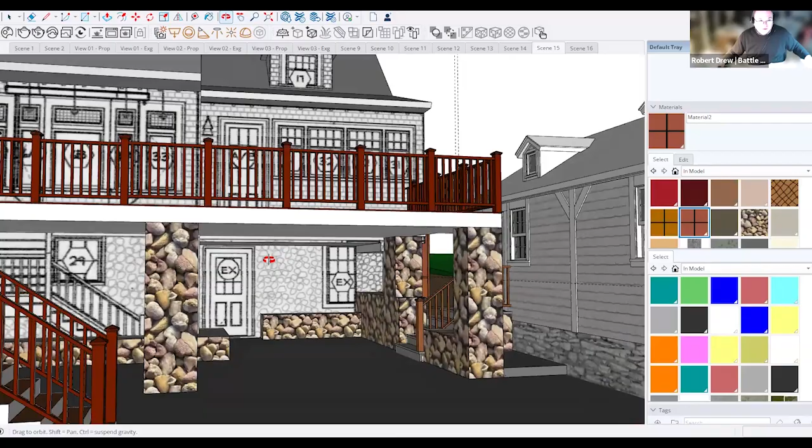And that gets moved under the beadboard. And then the last one is kind of by the door, which I'm going to show you on the model, it's probably a little easier. It's right there, it's not visible from... Yeah, I'd say the same thing, paint it the same as the trim as you're doing on the front. Yep. Okay, thank you.

This all begs the question of, if you did not have security cameras, what's the next level of security that's available to you? I don't have outdoor security cameras on my house, and frankly, I don't think I miss them. If you're looking for an answer, I just think this is starting to get beyond the purview of the HDC. Certainly it's appropriate for you to be looking at each of these as design elements and their impact from the public ways.

But whether it's for insurance purposes or security purposes, these are independent judgments that I don't think the HDC... I'm looking purely at the visual effect on a historic property. I can appreciate that, but security is a different aspect altogether. So which is why I asked you, is there an alternative to security to having what are visually ahistoric elements added to the outside of the house? That's what I'm asking. Okay, well I think I'm coming at it entirely in terms of historic aesthetic, not questioning security. Okay, well I don't have an answer, but I do think that's a question better posed to the town more broadly.

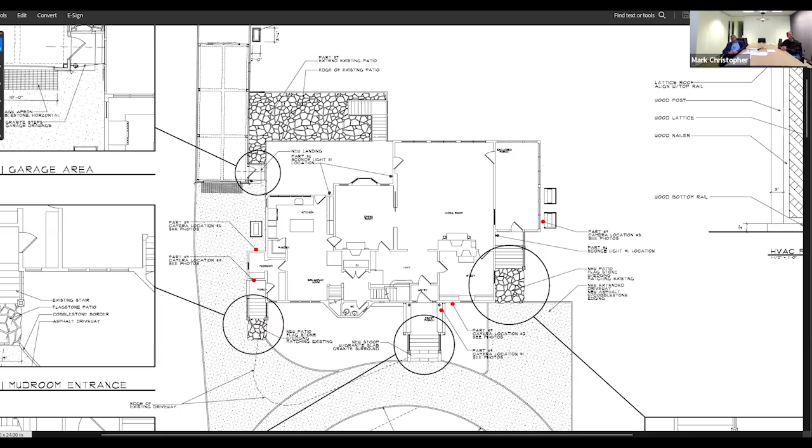I'd represent that the apron in front of the garage could probably be kept while we get rid of the two at the ends of the driveway. Yeah, I think that's great. I appreciate that, and from my perspective, I want to hear what the commission says, but having a stone apron in front of a garage makes sense to me—I have an old garage at my house, from 1910, with a stone apron. It's been there for years and looks appropriate. It's larger stones, but it's so far from the street it's not really an apron per se. So if the aprons at the street came out, I think that would be a great improvement.

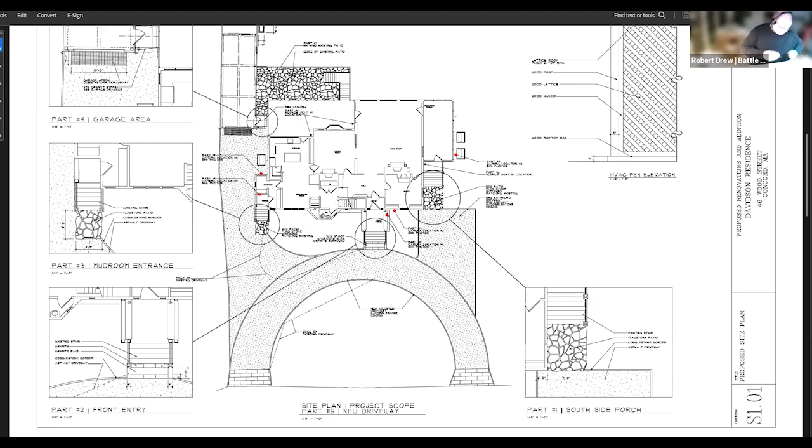There's also a movement in town to remove as many impermeable surfaces as possible. I know someone on Belknap Street is talking about proposing something to the town to have a tax on impermeable surfaces.

Would you consider gravel as an alternative for the driveway? Yeah, I like gravel. I actually looked at this very closely with my contractor, and we queried a lot of different subcontractors that do driveways in concrete, gravel, and asphalt. The basic conclusion is concrete is way more expensive, but you can make it look pretty much however you want, almost like natural earth.

Aesthetically, I would prefer not even a gravel driveway, but an unfinished dirt driveway, the sort of farmyard thing you might see in an old European field. But of course, driving over that and getting somebody to plow it in winter would be totally impractical. This driveway slopes down quite radically from the street, and it's very difficult to keep the gravel in shape. It's actually been difficult to find a company willing to plow it in winter.

In this case, I think asphalt is affordable, unlike concrete, and can be done much quicker. The concrete takes a very long time to put in. Some of the new gravel I've seen is not always that attractive, and the cobblestone edging that sometimes goes with it isn't always attractively handled. So it's also a matter of having confidence that what you ask for will come out as something pleasing.

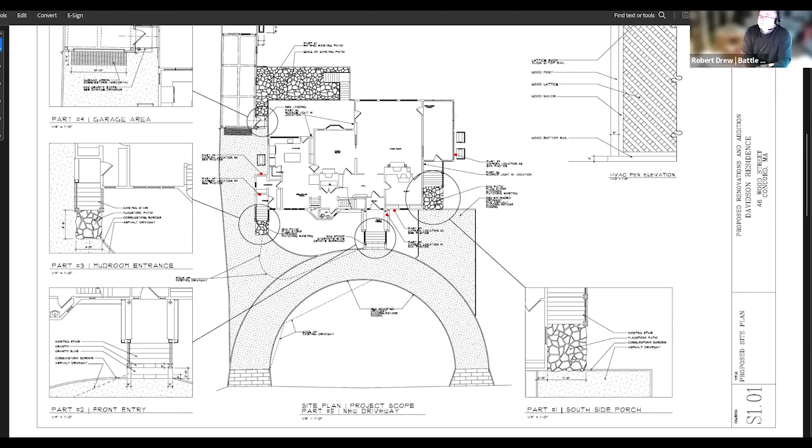Any other comments under the other phases, or all phases, or any phases? Happy to take any questions and spin you guys around the model if it makes you feel comfortable.

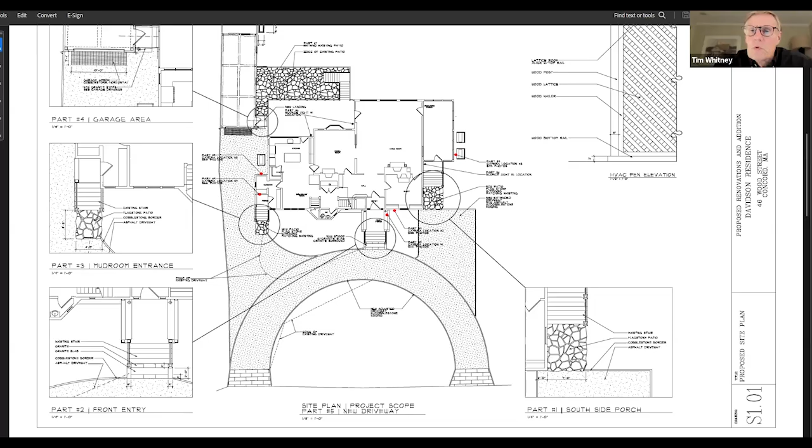If not, I'll go to any public comments. Don't hear anything. Maybe we could stop screen sharing, Robert, if we could. Sorry, guys. Oh, good. Thank you. Welcome.

I think we're at time to make a motion. Bill, it's your turn, I think. All right, if you can remember all the security camera locations. Do you need help, Bill? Well, yeah, correct me as we go along. Move we approve 46 Wood Street with the following modifications.

First, for the new garage fixture, it should be limited to 25 watts and have a motion detector switch. Second, with regard to cobblestones, the existing cobblestones at the junction of the driveway and the street will be removed. Finally, with respect to security cameras, the housings will be painted to match the wood they're up against: white in the eaves, gray on the walls. The right-hand screen porch will be moved up, nestled into the joists, and the angle bracket taken off.

The two porch-mounted cameras will be moved up to screen them from the street, and the camera to the immediate right of the front door will be removed. And the rear light gets moved off the joist up under the beadboard ceiling. Is that covered? I think it does. That's what I have in my notes.